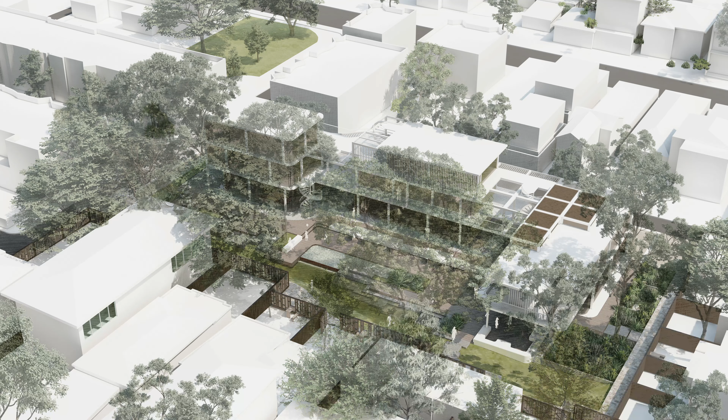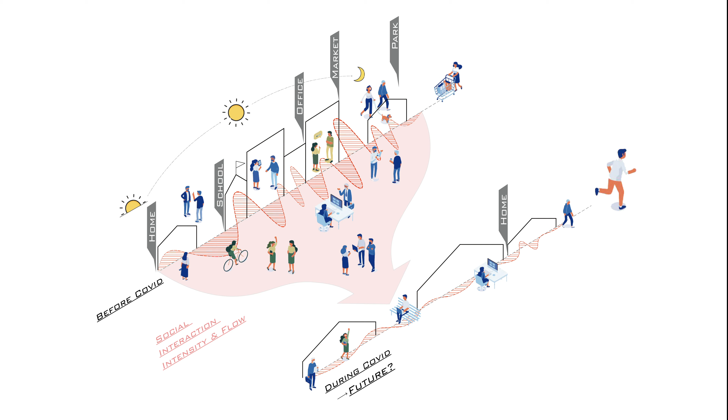Farewell, ex-neighborhood. All of you have just gone through stage 4 lockdown for more than 3 months. It must be a very uncomfortable and depressing process. If another wave of epidemic occurs in the future, stage 4 could be enforced for half a year or even more than a year. Are you satisfied with the neighborhood you live in?

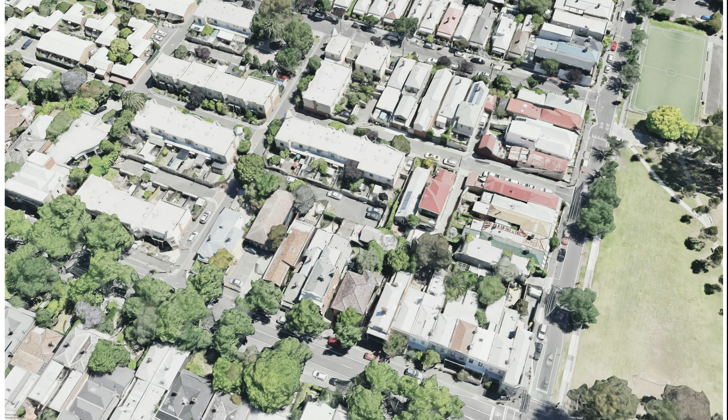Do you think the neighborhood you live in has the capability to be interesting enough to trap you for a year? This is a typical Richmond block, a pure residential one, where services and consumption are out of reach, and many backland spaces inside the block are idle or passively used for parking. What a boring block. Can you imagine living in such a cage under COVID context? What about this one?

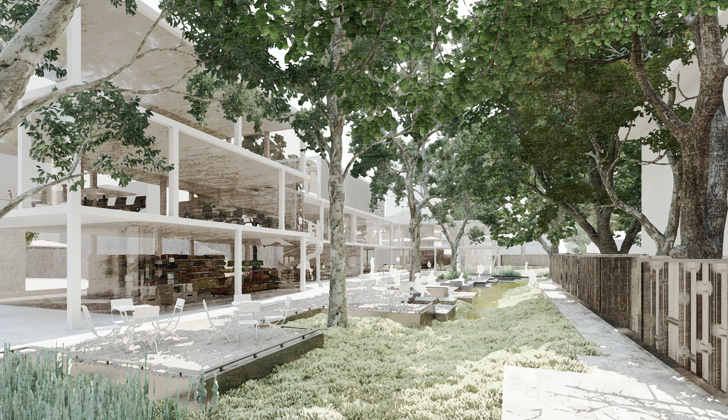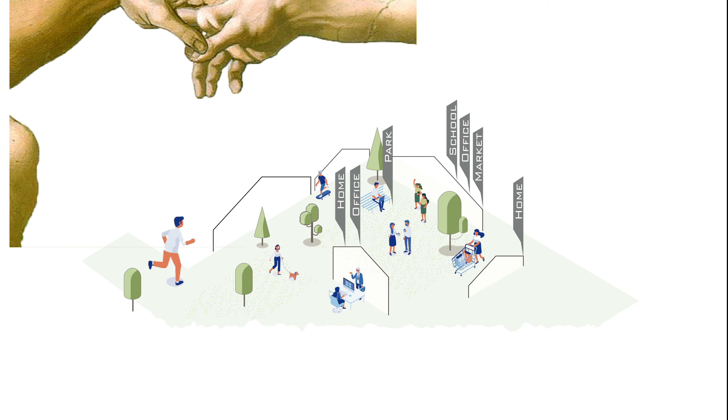It is an opportunity to encourage people to explore and adapt new living patterns and spaces through citizens' closest public space, a neighborhood block. I propose a concept of socio-resilient hub neighborhood block as a living unit to build up a more mixed-use block development that brings more diverse experiences, services, and multi-dimensional living space back to neighbors.

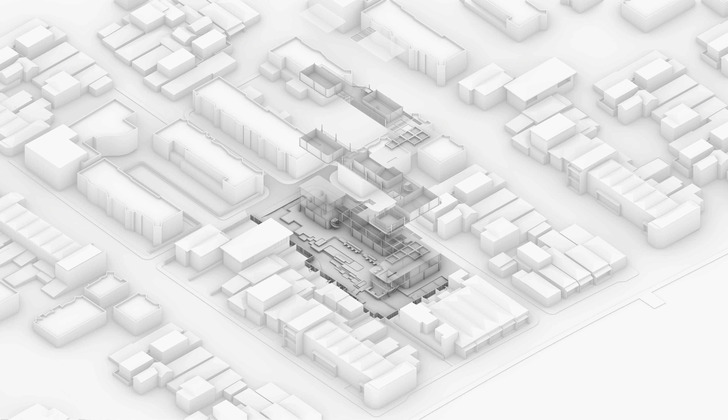The purpose of the hub's construction is to provide the surrounding blocks with a normal daily life pattern when locked down. My design site is selected in a block bordered by 3 streets, a place that can relatively serve the most people. Here I propose 3 major strategies to achieve my goal.

Strategy 1, anchoring tenants, is to get funds and mixed-use leasing in order to have the money to maintain the system, enrich the lives of residents, and provide employment opportunities.

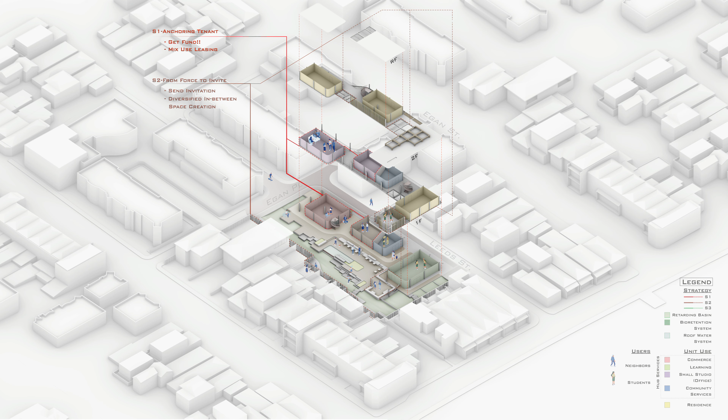Strategy 2, from force to invite, is to send out invitations and create diversified in-between spaces. Strategy 3 is to maximize the use and collaboration between landscape and architecture. On-site water treatment systems will serve both landscape beauty and give back resources to neighbors.

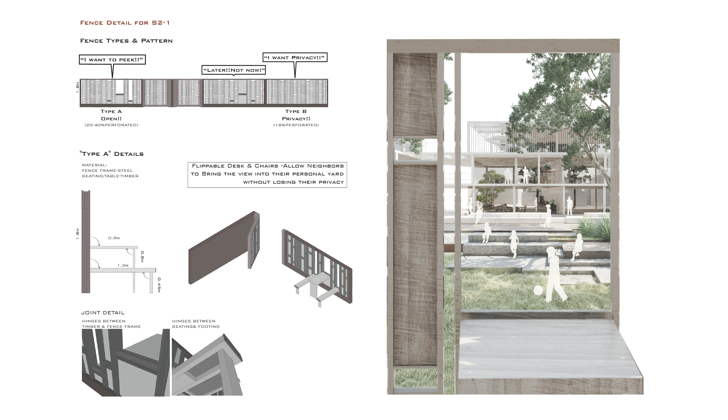How do we avoid upsetting neighbors, since the new public space is relatively noisier and reduces their privacy compared to the original parking space? As for sending invitations, a new fence with gaps allows neighbors to open this passage and partially engage with the vibe according to their wishes, opening up their backyard.

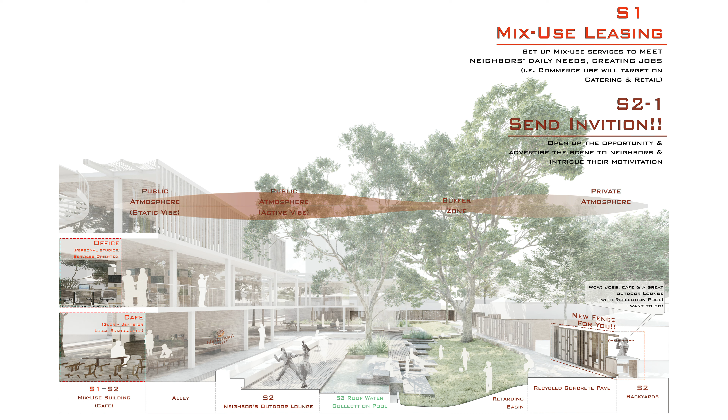The vibe of the entire square space, from residence to mixed-use building, creates an atmosphere from quiet to dynamic, hoping to gradually lead residents out and open their backyards.

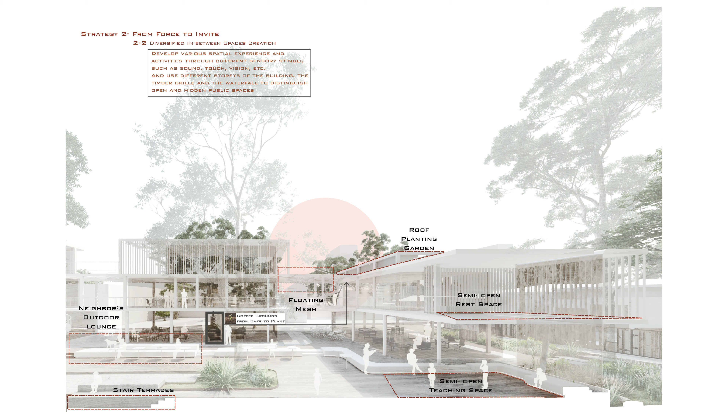Space between architecture and landscape can develop various spatial experiences and activities through different sensory stimuli such as sound, touch, and vision, using different stories of the building, the timber grille, and the waterfall to distinguish open and hidden public spaces.

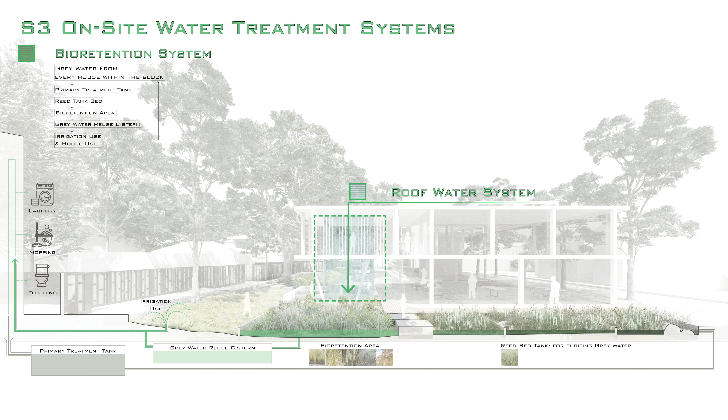Strategy 3: on-site water treatment system, bioretention system, roof water system, and retarding basin system. The bioretention system collects and purifies grey water from the whole block, including the existing houses and the new building, and gives it back for flushing, mopping, and doing laundry. The plants themselves also provide aesthetic value to the neighbors.

As for the retarding basin, when the rain falls and the water level is over 50 centimeters, the overflow will pour into the grey water reuse system and join the bioretention system for reuse.

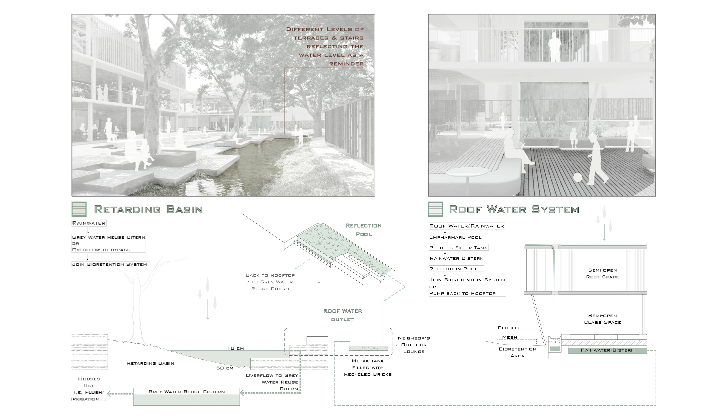Roof water system: the roof water from the hub will join together and form a fall on the second floor straight to the ground floor and into the rainwater system, creating visual and auditory stimulation. The rainwater will further flow to the reflection pools in the neighbor's outdoor lounge to generate a more static view for the middle square. Finally, it will also join the grey water system or be pumped back to the rooftop to play the view again.

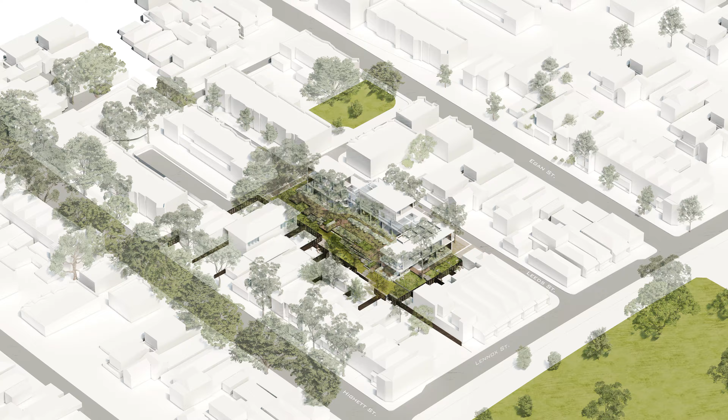With this new model of socio-resilient hub, I believe it may set up as an example to show how multidimensional activities and experiences we may have within such a small place, a block, and how landscape architects stand at a really critical role at this block-scale retrofit. Hope you like it.

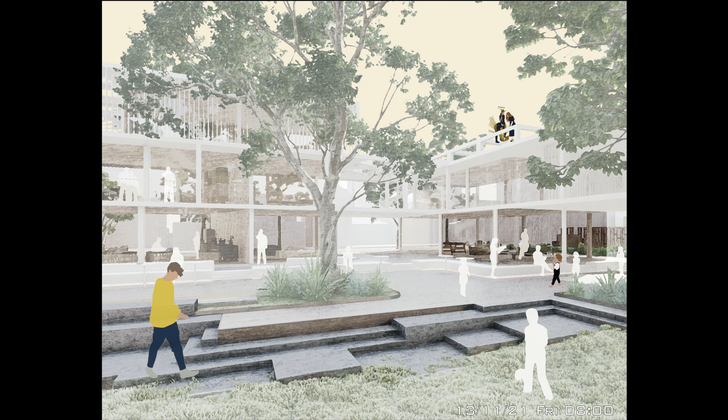Eco-fiction time. My name is Pohan. Well, today is Friday, November 13th, which is also the day when stage 4 restrictions have stayed for a year. Honest to say, I already forgot. The reason I know is because my kid asked to participate in tonight's coronavirus party. It is good to live here, I would say. As a single father, I can drop my kid off within 10 meters walking distance, and my office sits right next to it. How good is that?

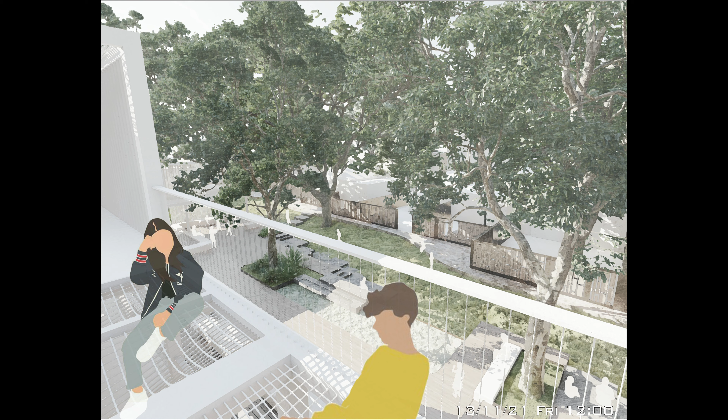Joanne, my girlfriend, who temporarily stays in this hub for work, we sit on this weird floating mesh, but it's oddly interesting and relaxing. We complain to each other about work and how chaotic the world is right now. But when I look down at this little cozy community and my son running on the retarding basin, everything doesn't seem to matter anymore. Woolworths Express finally delivered some fruits today, Joanne said to me and rushed to buy. The rain just stopped. I look at the water reflection in the basin and hear the sound of the waterfall. There is one second I feel like I'm not in the city.

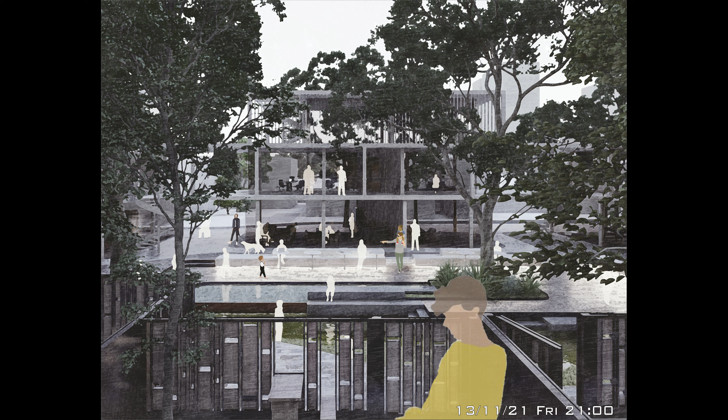After a tiring day, I sit at my backyard, or should I say front yard. Through the small window on my fence, I can see the crowds having a party at the community square as if the pandemic is over. But maybe it is really okay. After all, there is everything I need here, and I am still healthy and strong.